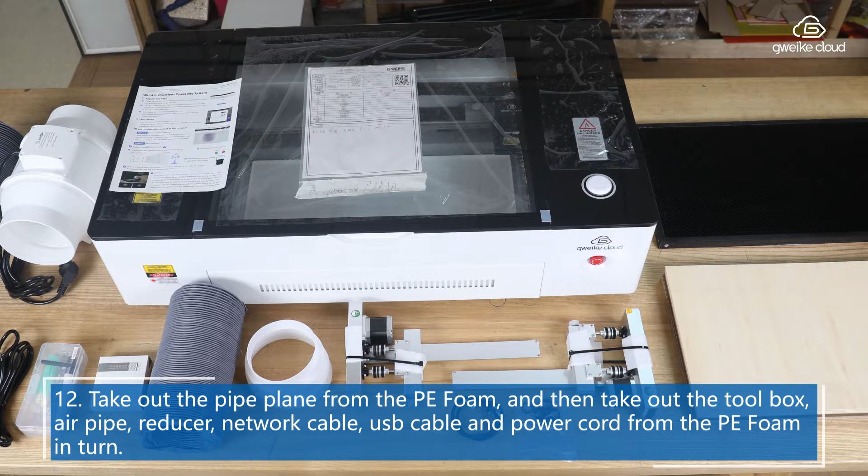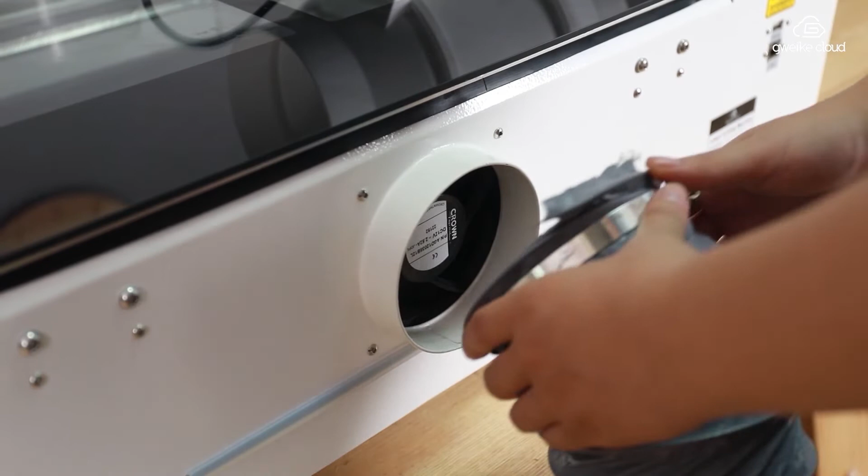Take the aluminum foil duct and stretch the retractable aluminum foil duct. Connect one end of the aluminum foil air duct to the exhaust port of the machine and tighten the clamp with a screwdriver.

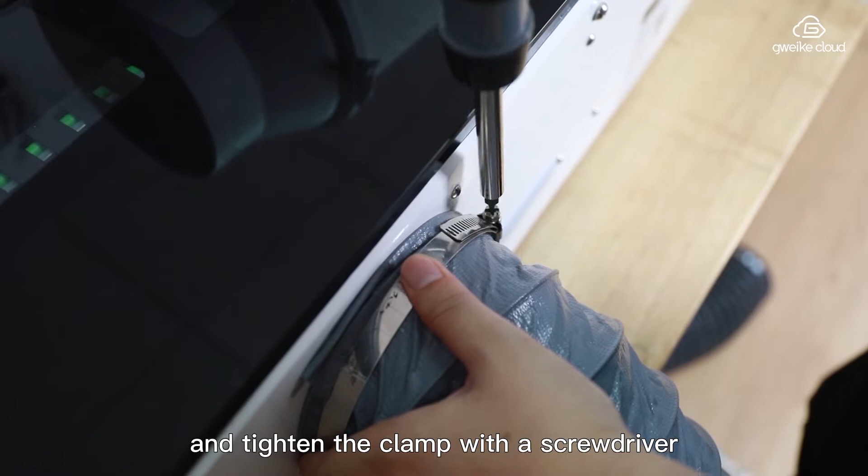Connect the other end of the aluminum foil air duct to the air inlet of the fan and tighten the clamp with a screwdriver.

Place the connected fan on the windowsill with the air outlet facing outwards. Turn on the fan control switch, adjust the fan speed, and complete the installation of the duct fan.

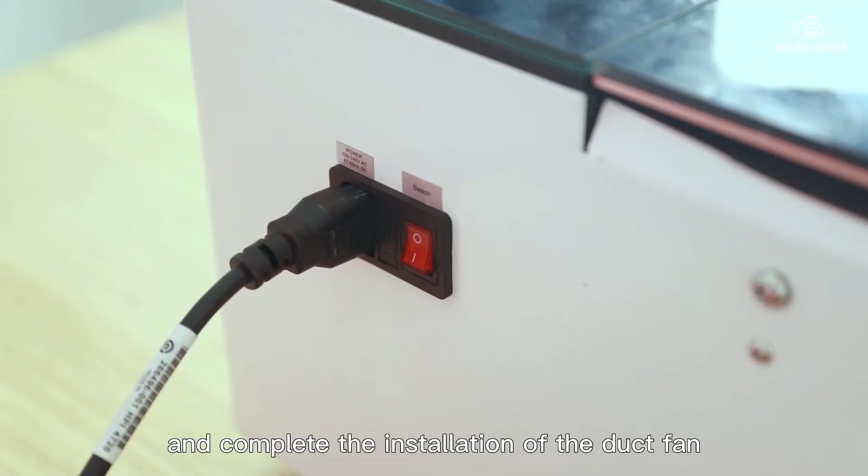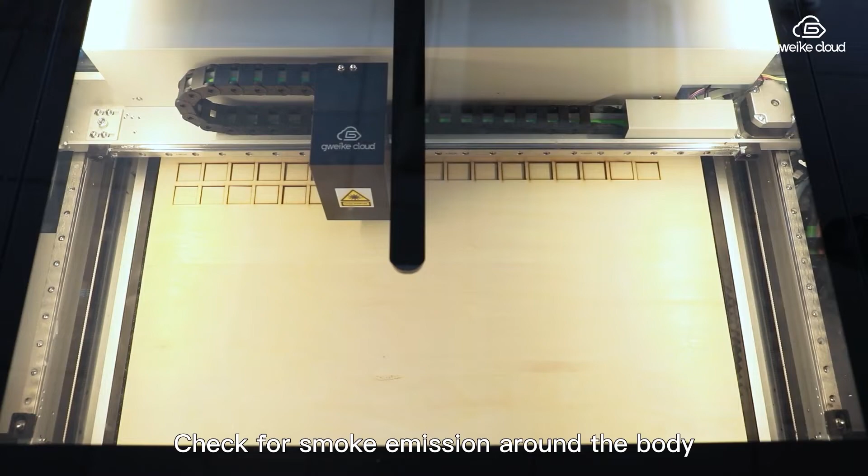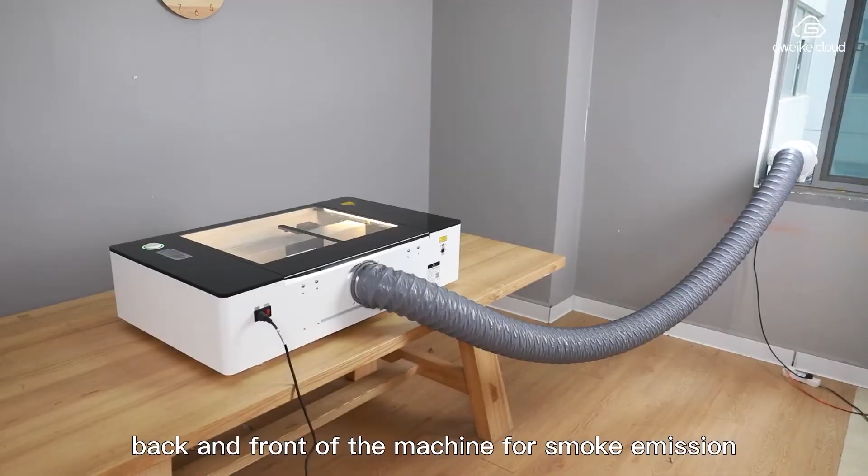Upload drawings and start cutting. Check for smoke emission around the machine. As the cutting time increases, observe the side, back, and front of the machine for smoke emission, and ensure that the flue exhaust effect is stable.

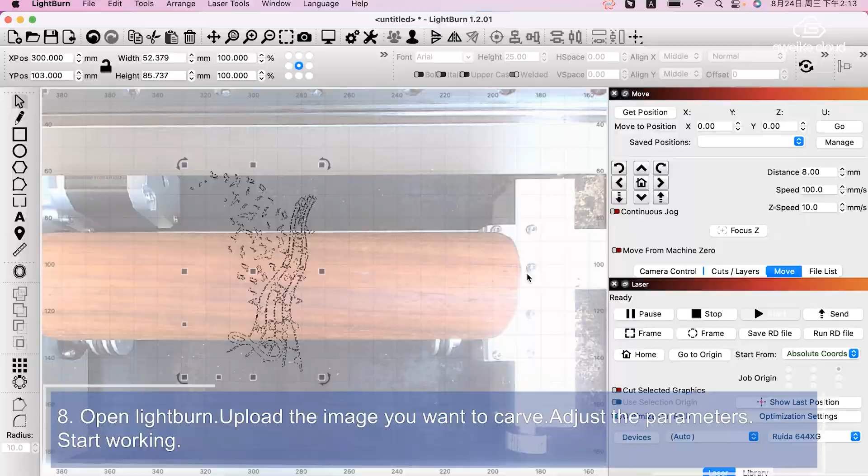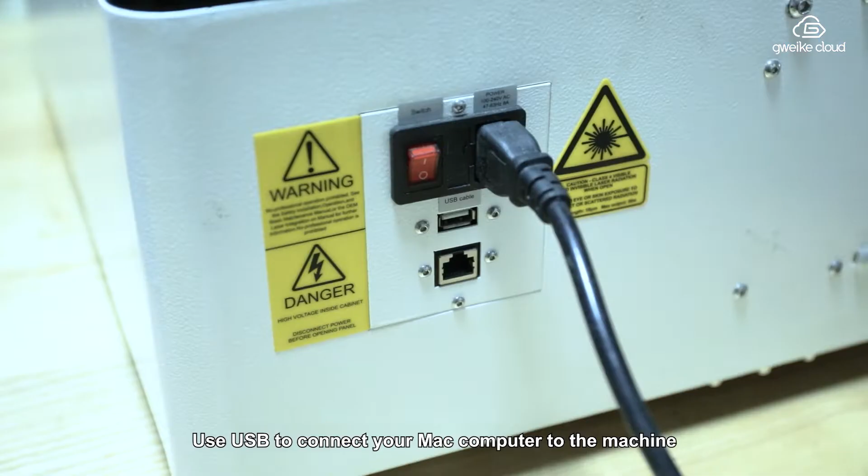LightBurn camera calibration instructions. Connect the attached double-end USB cable to the machine and the computer respectively. The camera cable USB connector is connected to the USB port of the laptop.

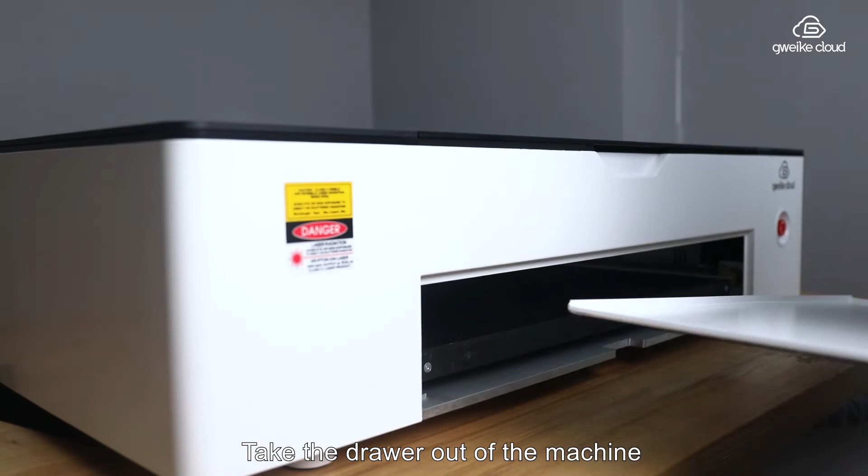Take the drawer out of the machine, put in prepared cardboard and wood, and printed calibration documents.

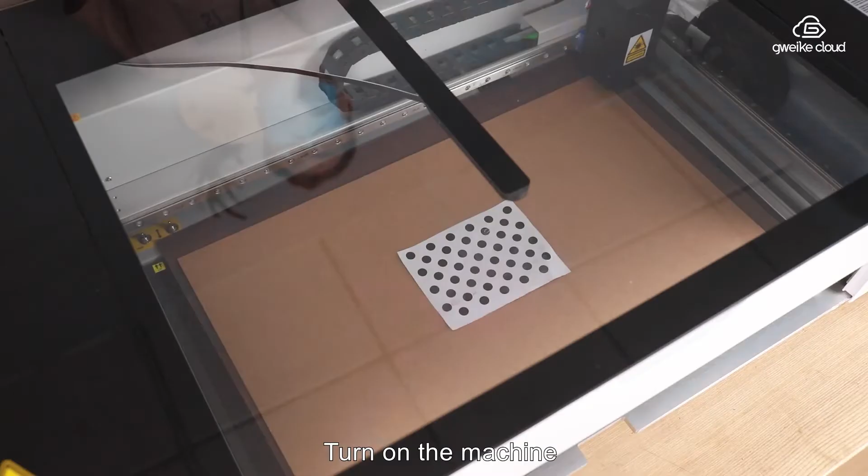Turn on the machine. Open the Lightburn software and select the camera control window. Open the Calibrate Camera Lens in the drop-down list of laser tools.

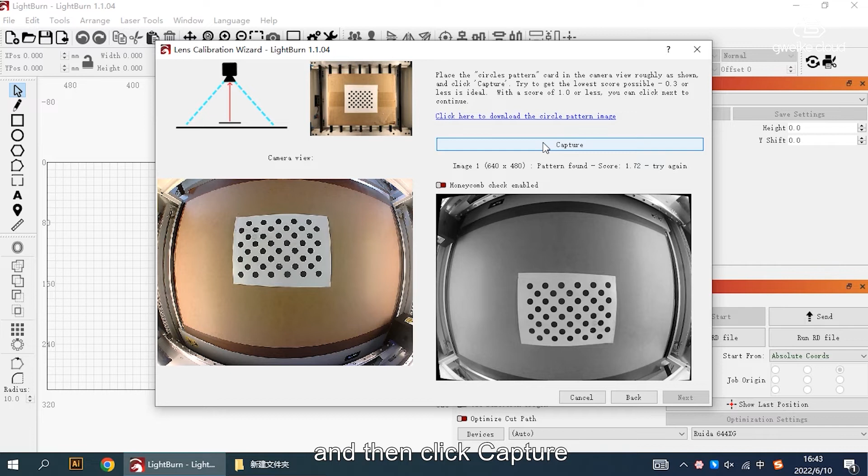Click the Capture button. Place the circle pattern card in the camera view and then click Capture. Try to get the lowest score possible.

0.3 or less is ideal. When the score is 1.0 or lower, click Next to continue.

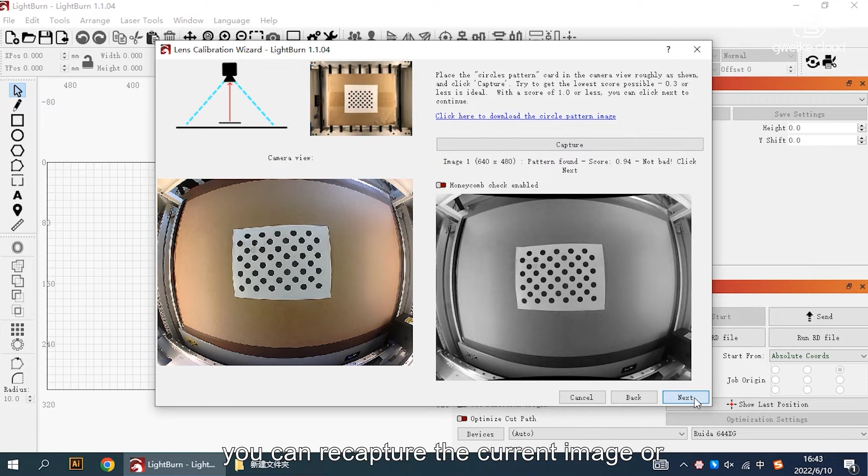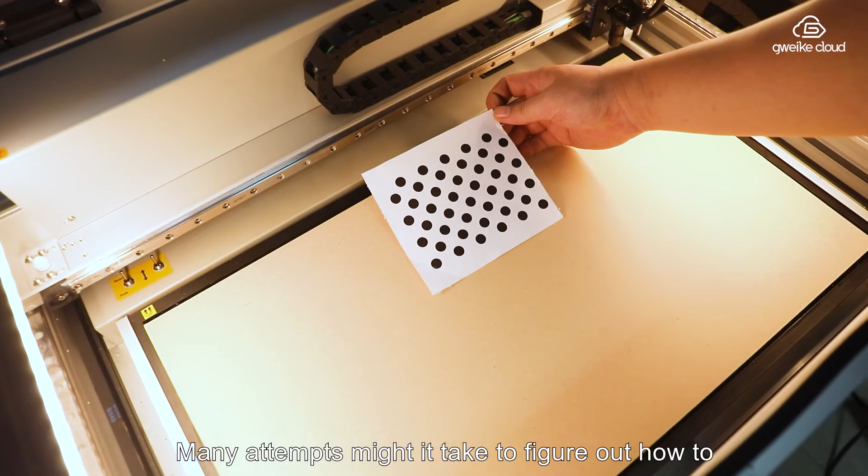If you don't get it immediately, you can recapture the current image or go back to the beginning and try again. It might take many attempts to figure out how to align the card with the camera to get the lowest score.

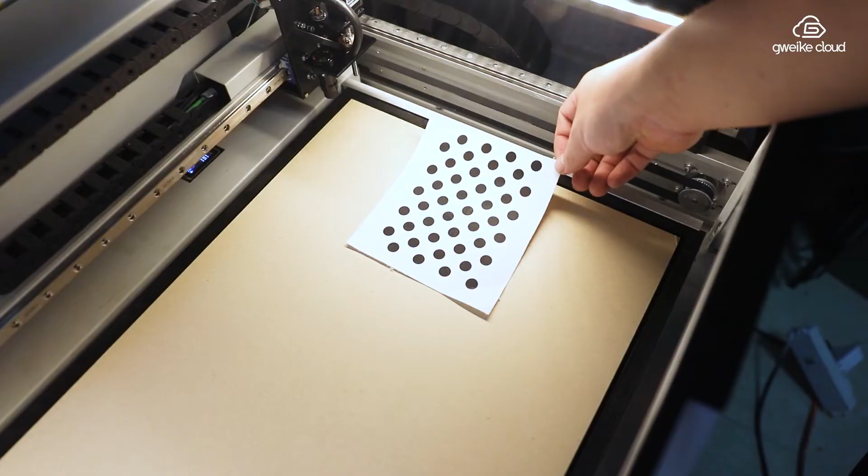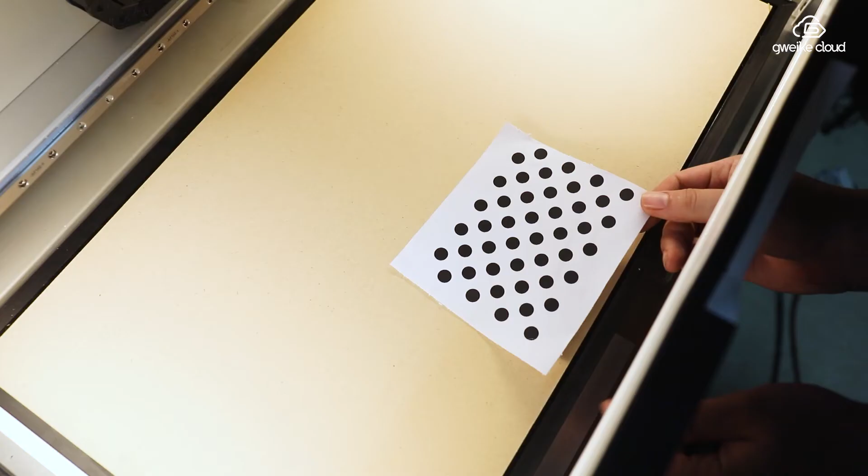As the capture continues, the image will be updated. The first 5 images are the center of the view, then the bottom, left, right, and then the top.

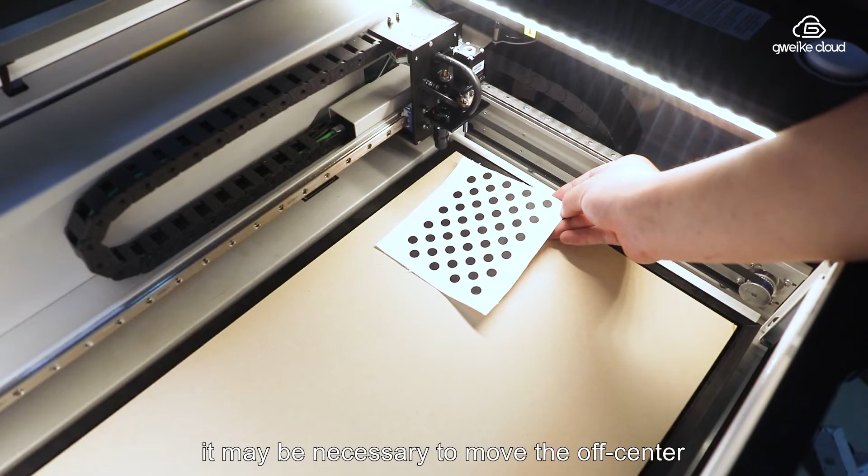If the camera has a very strong fisheye effect, it may be necessary to move the off-center image inward a bit to capture it successfully.

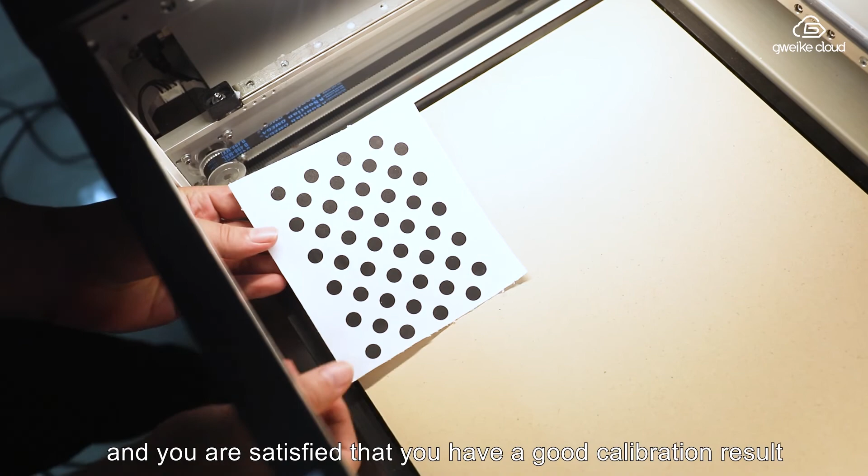When all the steps are complete and you are satisfied that you have a good calibration result in an undistorted image, click Finish to save the result.

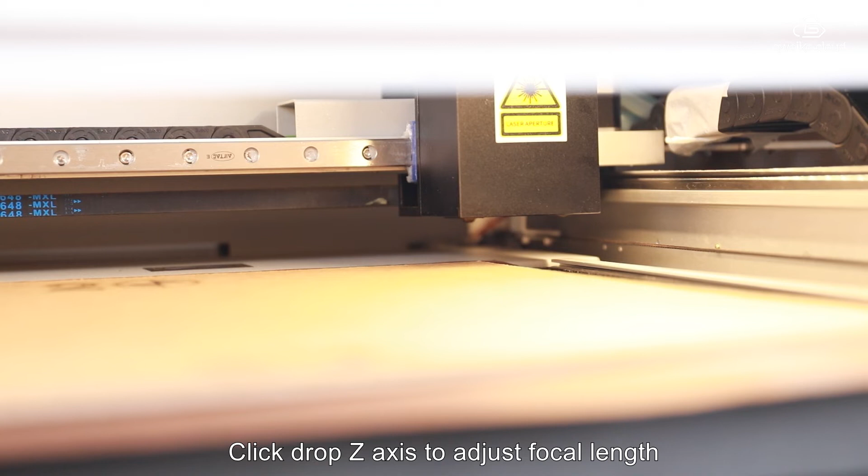Before proceeding to the next step, adjust the focal length Z-axis to an appropriate position. Select the Move menu in the menu bar and change the distance to 14. Click Drop Z-axis to adjust the focal length.

Adjust material thickness to 3, fill speed to 100, fill power to 25, line speed to 30, and finally line power to 25.

Click the Frame button to observe the printed range of the machine and see if it is placed on the board. After confirming the correct range, click the Start button to start printing.

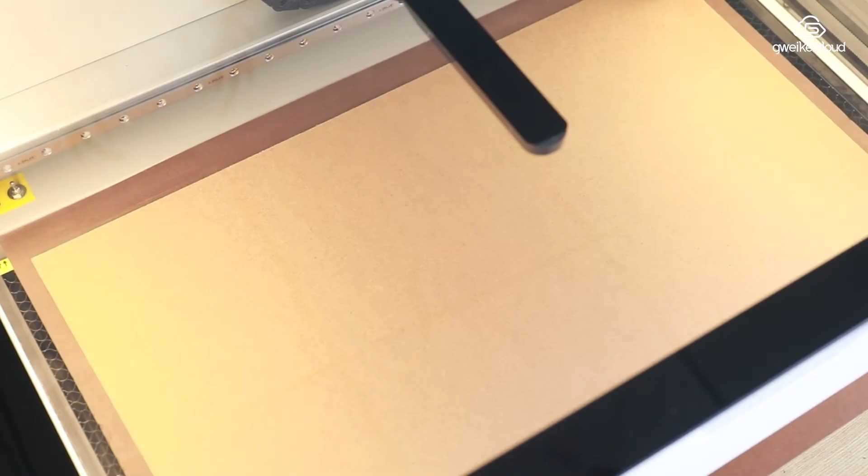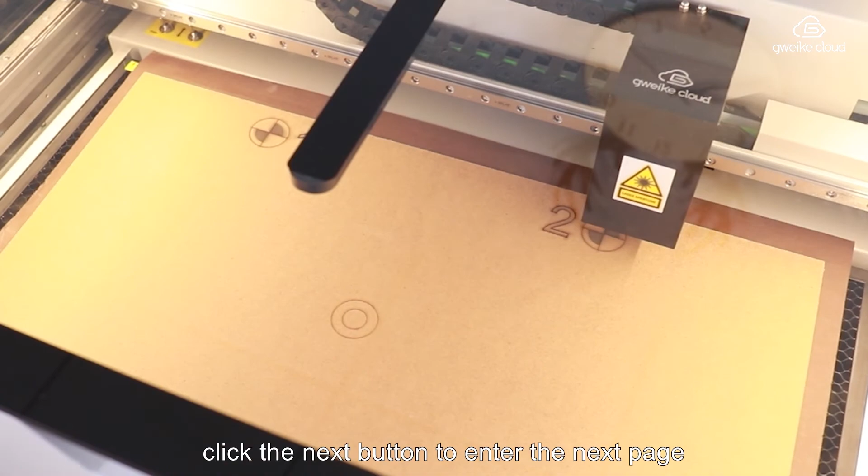Wait for the machine to finish printing. Click the Next button to enter the next page. Click the Capture Image button and the camera picture will appear on the right side of the page. After confirming, click Next.

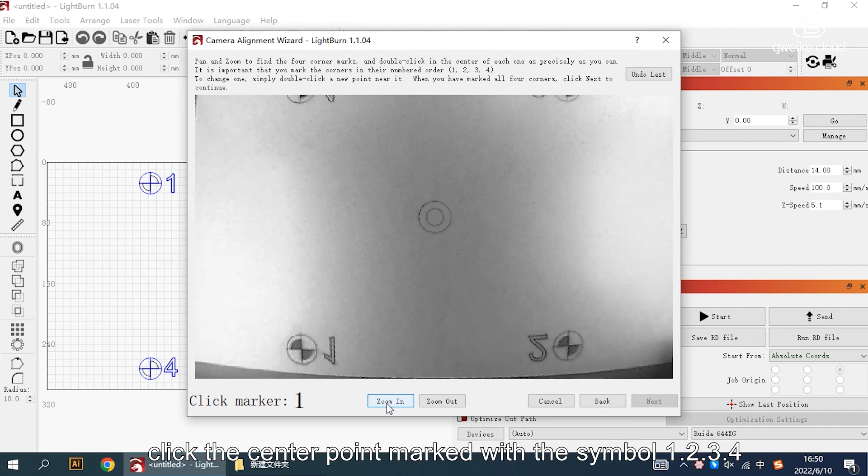According to the prompts on the page, click the center point marked with the symbols 1, 2, 3, 4. Click to generate the cross symbol with the screen cross line as far as possible overlapping. Finally, a standard square will be formed.

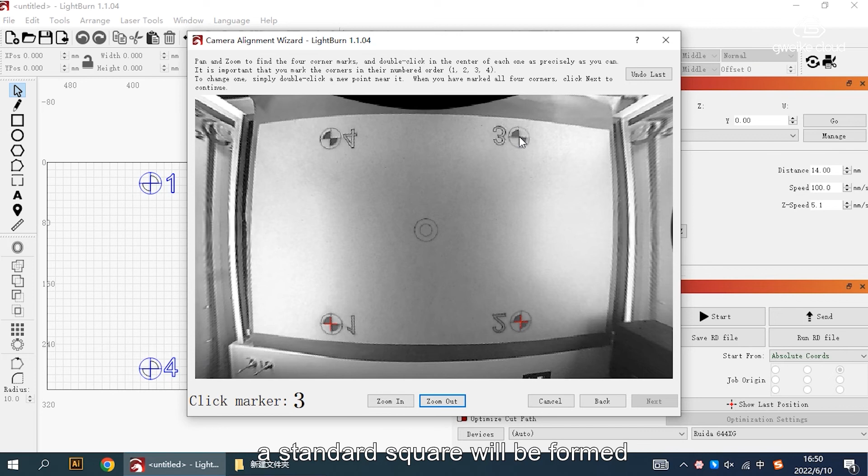Click Next to align the camera. Select camera control to enter the camera setting page. Click the Update Overlay button to upload the camera image to the processing page.

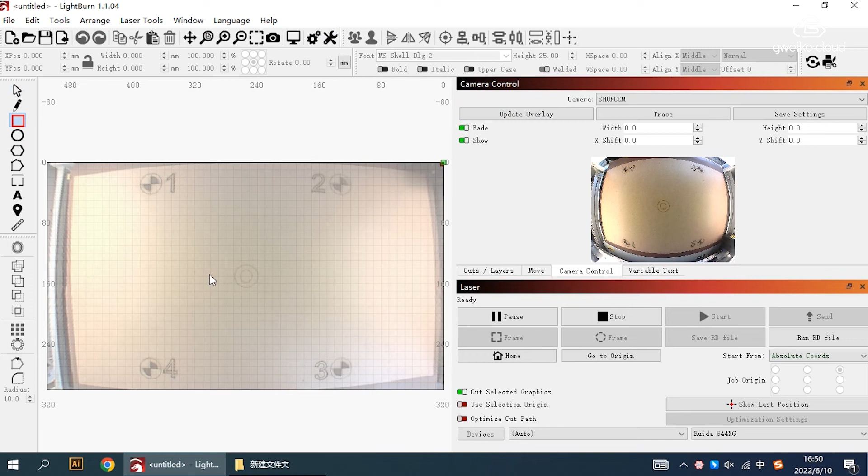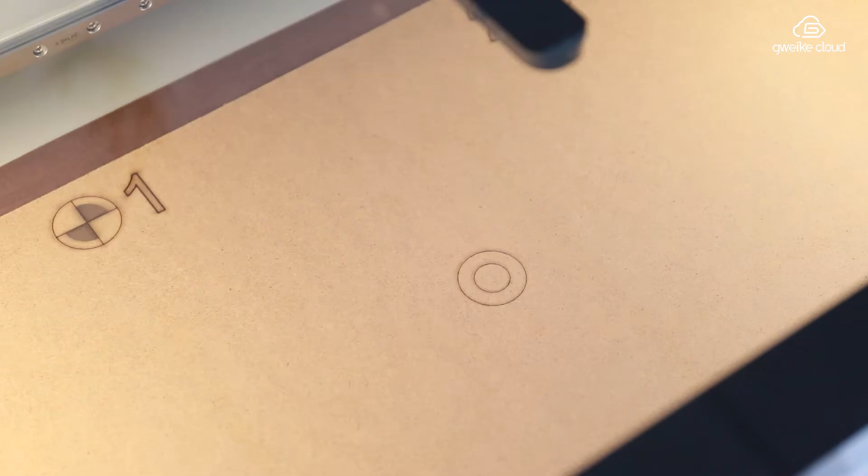Draw a random graph on the processing page and process it to test the effect of camera calibration. If the deviation between the processed page and actual processed graph is within 1 to 2 mm, the camera calibration is successful. If the deviation is too large, repeat the camera calibration steps.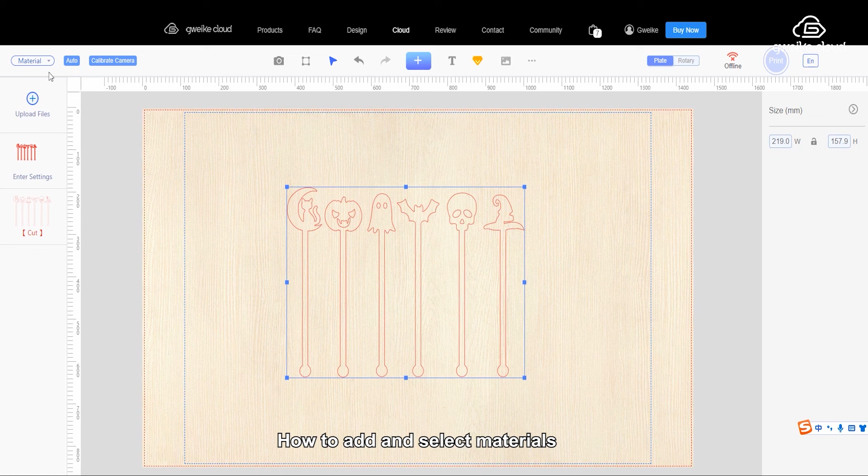How to add and select materials. Open the Material button on the top left corner of the cloud. Click Add to load the Add Material screen. In the Add Material screen, click Confirm after adding the appropriate parameters.

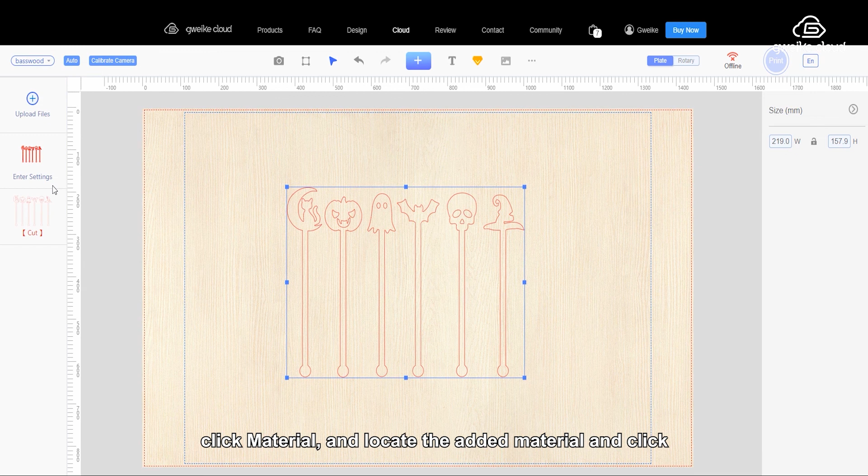Display success, click OK, and the material list will have the material you added. Select material, select the graphic to be processed. Click Material, locate the added material and click. Check the parameter settings — the parameters have been added successfully.